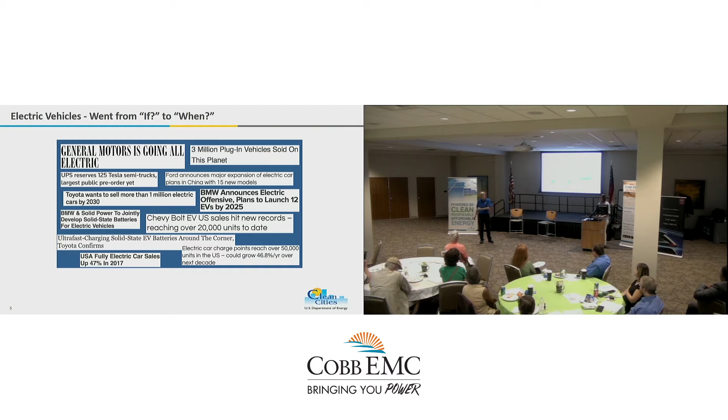I want to talk a little bit about some of the technology because there's a lot of confusion about what's what. There are basically 3 types of electric vehicles. Hybrid electric vehicle, you know that one really well. That's the Toyota Prius, been out there a very long time, a very good technology. There are applications where it makes the most sense.

There are plug-in hybrids. The poster child for the plug-in hybrid is the Chevrolet Volt, V-O-L-T, not the Chevrolet Bolt, B-O-L-T. Plugs in, runs part-time on battery. When the battery's depleted, the engine starts running and runs like a hybrid. Really, really high fuel economy.

I know one of the guys in the room, Chris Campbell back there, had a Volt. He would tell me he would go a whole year on 1 tank of gas. And he drove a lot because he knew exactly how to maximize the utilization.

The battery electric vehicle, the poster child here is the Nissan Leaf. If you look at the 30,000+ electric vehicles registered in Georgia, 25,000 of them are Nissan Leafs. And there's a big reason why that is. Primarily, and you'll hear from Cornelius later, Nissan is all in. Their chief executive, Carlos Ghosn, has said, we're going to be building nothing but a battery electric vehicle in the future.

Availability is way up. In 2011, I bought my first Nissan Leaf. There were 6 vehicles available in the US, not all of them here in Georgia. We really only had 2 at the time. Today, there's more than 40, and that list grows. This list is not accurate because I made it today, because it changes every day. Every manufacturer out there, and my personal opinion is, if a manufacturer is not building a vehicle with a plug, they are the world's best buggy whip manufacturer. And they're soon going to be out of business. I'll show you why in a little bit.

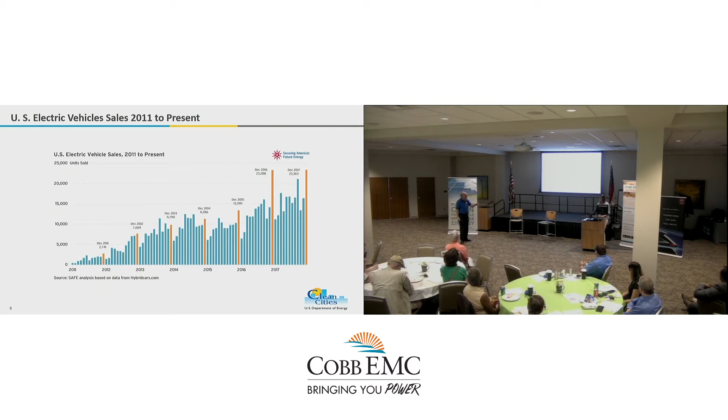Curves are in the right direction. Every year, every month, we beat the previous year. We beat the previous month in sales. And you'll notice this little thing, because everybody kind of does things in December because of the tax credits. There's a federal tax credit for electric vehicles, too. So you see this drop off in January, then it picks back up, drops off every year, but the curve is that way. And that's the adoption rate.

Next one, this is from Bloomberg. I've seen all kinds of charts here, but basically what this says is we're at 1% of the market today. By 2040, 54% of the vehicles sold will have a plug on them.

I've also seen a chart done by a guy named Tony Seba, who has a book out called Disruptive Clean Technologies. He says this is not a 25-year event, it's a 10-year event. 10 years from now, it'll be like the smartphone. 10 years ago, you didn't have one. Now, if you leave the house without it, you'll turn around and go back and get it because you can't get through the day without it in your hand.

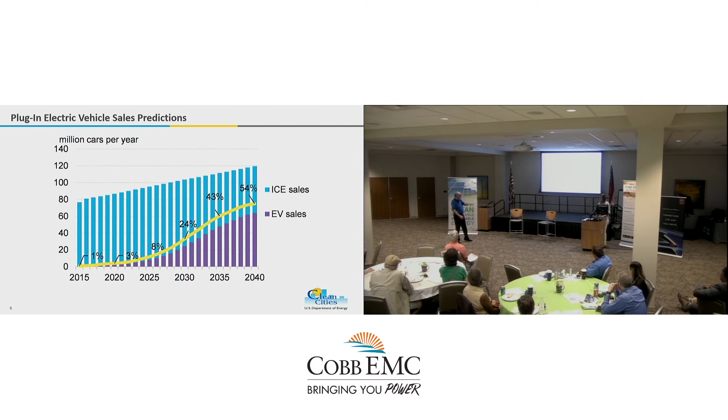I've started noticing people carry it around like this. I at least put it in my pocket. And there's a reason why this is going to happen. Let's go to the next one. Costs are dropping dramatically.

1998, the EV1. I drove an EV1 at Georgia Power for 4, 5, 6 years. $500 a mile of range. The joke used to be, how did you get cheap batteries? You buy the car and throw the car away, because the car costs less than the batteries did, because they were being sold at a loss.

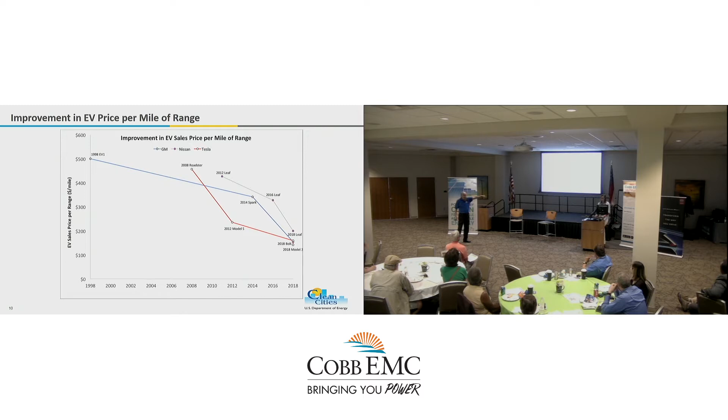Today, you get out to 2018, the Model 3, there's a Tesla Model 3 out there. It is right now the lowest cost per mile of range, but the Bolt is right there, the Nissan Leaf is right there, and that price continues to go down. Let's go to the next slide.

This one is really interesting. Cost per kilowatt hour in a battery pack. We are obviously out here 2016, 17, 18, still a little over $100 a kilowatt hour. Two lines there: affordable EV, economy EV. Look at that green line out there about 2023.

You will go into the dealership in 2023 and there'll be 2 cars on the floor. They cost exactly the same. One's gasoline, one's battery electric. The gasoline's only advantage is it goes a little bit further and it fills up quicker. The electric vehicle goes 200, 300 miles on a charge, maybe takes 30, 40 minutes to recharge, costs you 1/10 the operating cost of the gasoline vehicle.

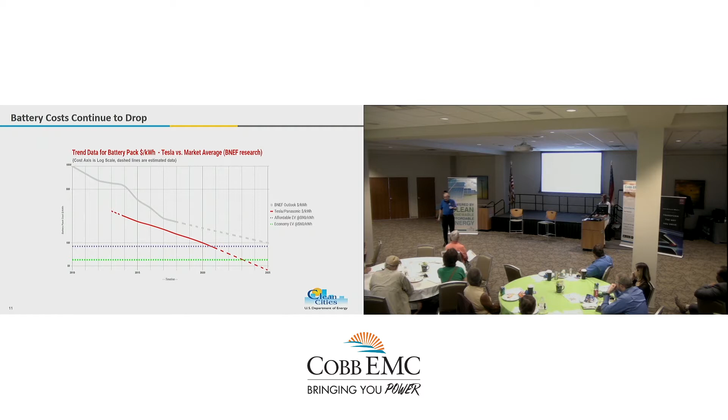So you will only buy a gasoline vehicle if you need to drive long distances and fuel quickly. If you drive back and forth to work every day, park at home, park at work, maybe there's charging at work, you won't even consider a gasoline vehicle because you don't need it, and it's cheaper to get the electric. That's what they call the crossover point, and that's when things really take off. Because the electric will be cheaper to buy, cheaper to operate. It just has one disadvantage: it takes a little bit longer to refuel than a gasoline vehicle.

Next one, we're concentrated right now in certain parts of the country. Atlanta and Georgia did really, really well because we had a very nice incentive, a $5,000 state income tax credit, in addition to the $7,500 federal income tax credit. Unfortunately, this is the editorial part, our short-sighted legislature did away with that tax credit in 2015, and it's costing the state of Georgia millions of dollars a year in revenue. I can get into that with you one-on-one. Just know that your legislature has driven up the cost to the state by eliminating this tax credit.

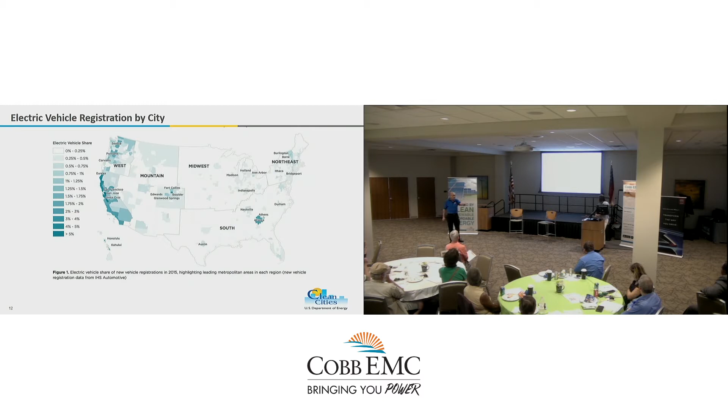And again, the demographics are right. The commuting is right, and we drive a lot of miles and you save a lot of money because you're using electric instead of gasoline. Next one, I want to talk a little bit about the buzzwords here, the technology on charging. It's the next key critical issue. I said, okay, I got the car, now what do I do?

We have 3 levels of AC charging, and there's actually 3 levels of DC charging. Level 1 is 120 volt, 15 amp outlet. You got one in your garage, you can plug it in, the cord that you need comes with the car, plug it in, charge it up overnight.

My neighbors, I live in DeKalb County over in the Toco Hills area. My neighbor next door worked at Emory. He just charged his car on 110 volts, and I asked him why. I have a 240-volt charger in my garage, but he said, I'm 5 miles from Emory, so I go 5 miles over, 5 miles back, 10 miles a day. That would take him maybe 2 hours to charge at 110 volts. There's no reason to spend any more money if you're a low utilization user.

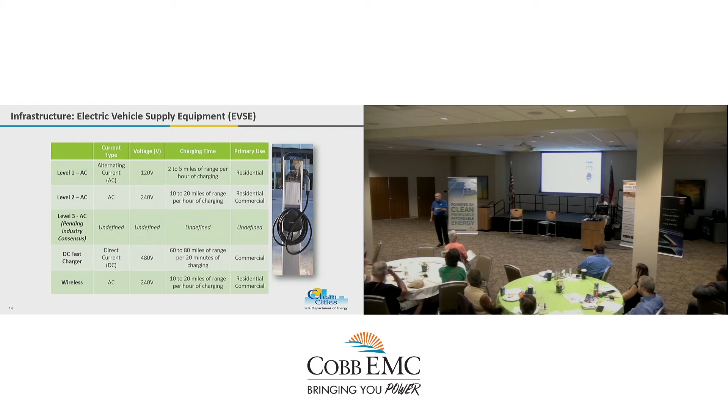You can charge at home, charge in public. You've got to charge in one of two places. Your car sits 22 hours a day somewhere, either at your home or at your workplace. You really only need to charge in one of those two locations, maybe once a day, maybe not once a day. My wife and I, all we have is electric vehicles. We're now totally gasoline-free. She charges her car about once a week, and one of us has to remember to go out and plug her car in, because she only does about 100 miles a week. I charge my car 2-3 times a week because I do a lot more miles. But even with the lower mileage electric vehicles, if you can charge at work or at home, it'll work.

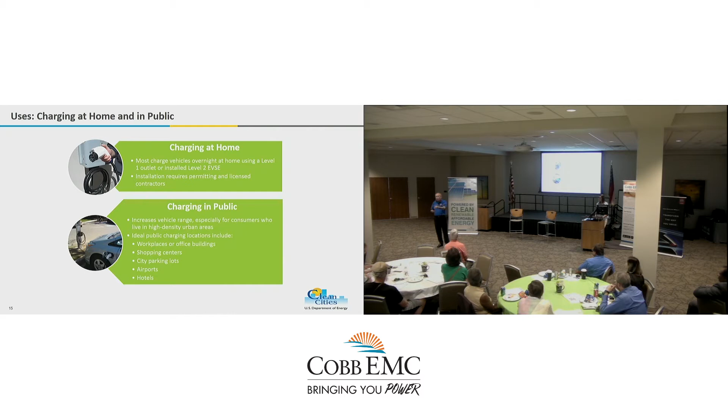I tell people, if you drive less than 50 miles a day, there is no scenario where an electric vehicle will not work for you with the current level of technology.

We are rapidly expanding the amount of EV infrastructure, places to charge. Not only spread all over the community, like here, there are chargers back here and chargers out front. I've used the ones out front in the past, but they're all over the place, at the malls, at the dealerships.

What we're working on right now is the corridors, so you can drive to Savannah, Chattanooga, Charlotte, Montgomery, or Birmingham, or wherever. Every 50 miles on the interstate, there's a place to charge the car with a DC fast charger, meaning that's a 15, 20-minute event.

Depending on what you're going to be doing, one of the stations I use is behind a Starbucks at Tifton. By the time I get out of the car, get my Frappuccino, and get back, the car's ready to go. It's waiting on me, I'm not waiting on it.

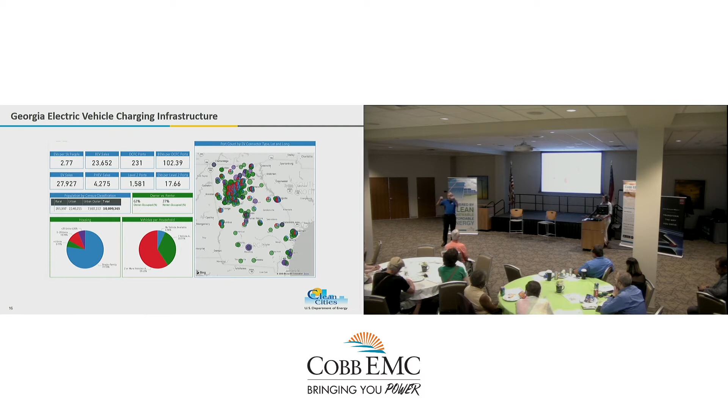I drove to Savannah already. My car will make it all the way to Savannah. I still had to stop in Dublin, not because the car needed to, but because I had to. I can't go as far as the car can go. So take the issue of range anxiety off the plate. It doesn't exist anymore.

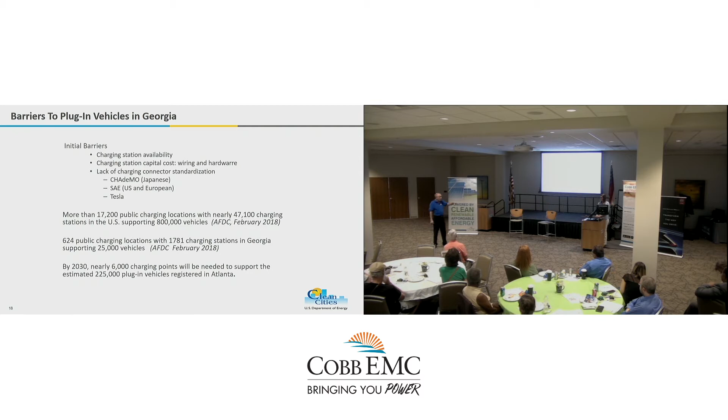People ask about emissions - well, you're just using that dirty coal-fired plant. We talked about renewables today. The electric vehicle is the only vehicle out there that can use renewable energy. And the larger the renewable energy component gets, the better the car gets.

I updated that slide. The last one I'd seen was about 60 miles per gallon. Today, on a nationwide basis, if your vehicle doesn't get 80 miles per gallon, you are dirtier than a gasoline vehicle or electric vehicle, even though it's running on a coal-fired plant. It varies across the country. Today, here in the Southeast, we're about 56 miles per gallon. So if your car is not getting more than 56 miles per gallon, I am cleaner than you.

I'm also a lot cheaper than you. And this is going to get better and better because the number of coal-fired plants continues to decline. The number of natural gas plants is increasing. Nuclear is coming on board. Nuclear is really great when you look at greenhouse gas emissions because there are none. And it's a 50-year asset - it's going to be out there doing something forever.

Again, and the renewables - solar and electric vehicles go together perfectly. You get a better return on investment if you have an electric vehicle that your solar panels are charging, because instead of buying $3 a gallon gasoline, you're getting free electricity. Go to the next one.

Looking at greenhouse gas emissions, even with today's mix of plants, we're at half the greenhouse gas emissions of a gasoline vehicle. If you look at criteria pollutants like nitrous oxides and smog—Atlanta's been the poster child for non-attainment for years—we see a 90% reduction, even with the current plants we have.

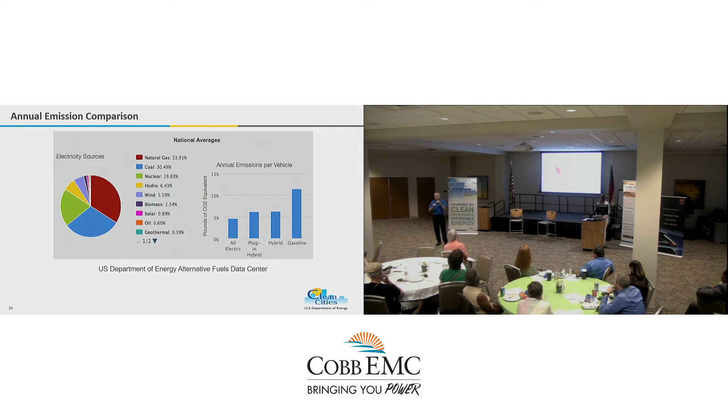Let's go to the next one. A lot of data, throwing a lot out there. It was mentioned in the last presentation about NREL, the National Renewable Energy Lab.

We have available through what's called the Alternative Fuels Data Center access to models and cost analyzers. You can go in there and say, I'm thinking about buying a new car, let me compare the car I usually buy with a Toyota Prius, a Chevrolet Volt, a Chevrolet Bolt, a Nissan Leaf, and do a cost comparison. You put in your miles, what you're paying for fuel, and it will tell you the best pick for you based on your situation.

Great location—there's other things here too, what's called the station locator down in the corner, part of the Alternative Fuels Data Center, AFDC. Google AFDC and you can find it, then look and see where the stations are around you. You'll be surprised how many electric vehicle charging stations are around you.

We have a goal. We're working on a project in the Buckhead area where no one will be more than about 250 yards from a charging station. The City of Atlanta just passed an ordinance requiring all new construction to be PEV-ready for 20% of the spaces, so this is happening very rapidly right now.

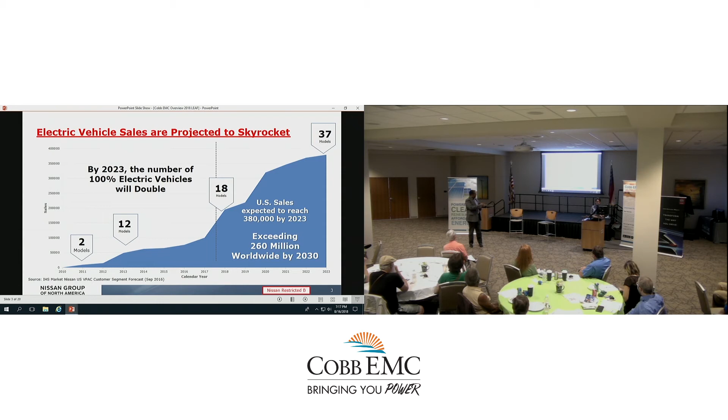Let me tell you why this is happening. You've all seen charts of what's happening globally. Right now, the Earth is the hottest it's been in 115,000 years. 16 of the 17 hottest years on record have occurred since the year 2000. And I don't know if you looked in the paper about a week ago, Europe recorded the hottest day it's ever had. I think Europe's been around a while. And I would say that when something like that happens, maybe it's not a fluke.

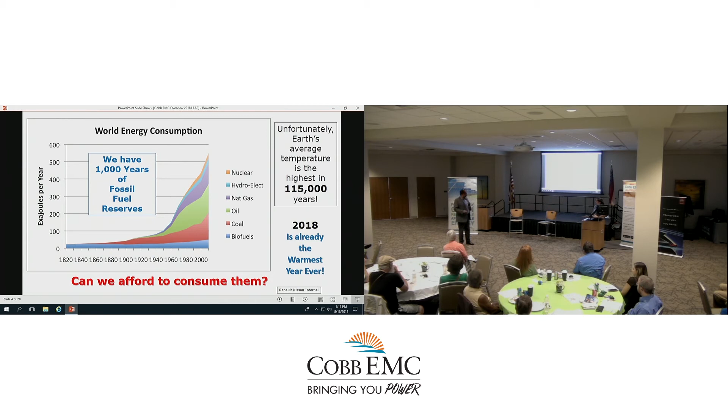Now, Atlanta. Atlanta has the fourth worst traffic in the nation. I know that when you're sitting on the connector, you might think that you're number one, but it's actually number 4.

15 counties are below the standard for attainment in air quality and particulate matter. Hopefully we don't get to the level of China, where they're saying they lose 1,500 people a day, and they have suggested that the elderly and children should not breathe the air. Now, they don't actually explain what the alternative is, but they've at least done their part, which is given you the warning.

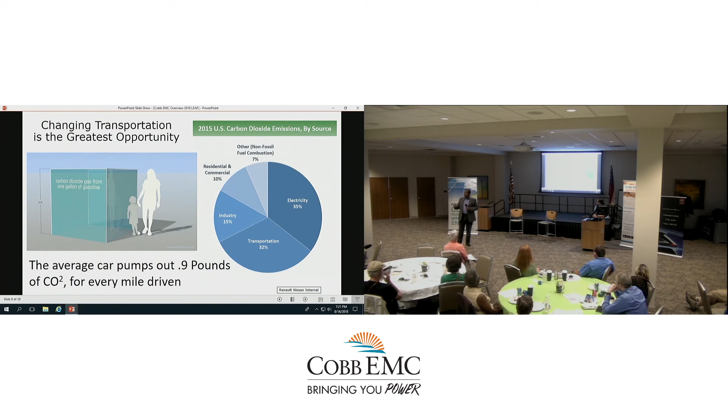Now, this gives you a pretty good idea what one gallon of gasoline produces in terms of CO2. And you can also take a look at where we have a chance to make a difference. You really can't make a difference in industry in terms of reducing CO2. It can be done by mandate, but we basically have industrial output that gives jobs, and it makes it really tough to cut back on that. But transportation is the variable. And we have the opportunity, through a conversion from gasoline engines to electric vehicles, to reduce the amount of carbon we put into the air.

When you look at the numbers from the National Household Travel Survey, which looked at 749,000 individual trips, you find that only 1% of trips exceed 70 miles, and 95% of trips are below 30 miles. That means an electric vehicle with a range of 150 to 200 miles is more than sufficient to handle your everyday needs. Now look at some of the other demographics.

Most people who drive electric vehicles are married. They already have their minivan or family hauler at home. When they go on vacation, they've got that vehicle for a long trip. They need a vehicle to go to work, they need a vehicle to get around. As a general rule, an electric vehicle will do that job more efficiently than a gas-powered vehicle will.

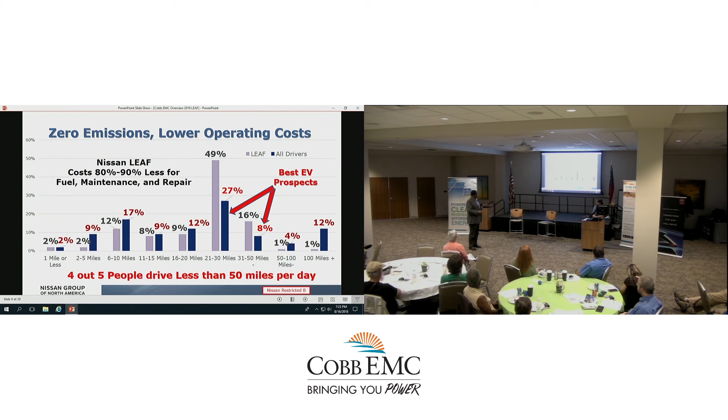I always think of this, and I did work for Ford, even though I now work for Nissan. Henry Ford, when asked about building a car, said most people would have told him they wanted a faster horse. We had this problem already, and it's interesting that every time we make a conversion, there are those people who try to hold the dam back.

The reality is that when the horse came along, it produced a problem in the United States. In Manhattan, there were about 440,000 horses in the New York area. And they have an emissions problem - about 35 pounds a day. 400,000 times 35 pounds a day, times a month, you can see where that could be a problem.

There was a belief that this was a problem that could not be overcome. There was no other answer until the automobile showed up. And within 10 years, there were only 20,000 horses in New York - the automobile had completely replaced the horse. We're now in a position where electric vehicles have an opportunity to replace gas-powered vehicles.

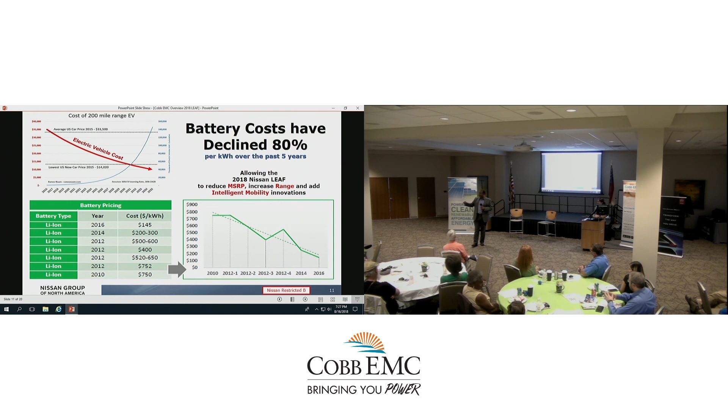We are the last generation that's going to ever have to give up driving. My mother gave up driving when she was 92. None of you will have to. There'll come a point where your car will drive itself, and it will be an electric car. You'll call it with your smartphone, and it will come from its parking space, come get you, take you where you want to go, and go park itself and wait for you to come back.

The reason that's going to happen is because of math. It costs a lot less to drive an electric car. When you talk about spending 10 cents on the dollar, go to the DOE numbers. The DOE numbers say that the average automobile in America is 11.4 years of age, has 150,000 miles on it, and costs $353 to keep on the road for fuel, maintenance, and repair, not including payment. There's going to be a transmission, a water pump, a thermostat, a fuel sending unit, spark plugs, oil changes. There's going to be costs, none of which exist on an electric vehicle.

That means that even if you look at something as economical as a Chevy Cruze or even a Chevy Volt, a Leaf, a 100% electric vehicle, costs significantly less to keep on the road.

Now, we win all types of awards. I'm going to skip through this part because I know we're going to be asking some questions later.

We won innovation awards. This part I think is going to be very interesting for you. Because we're dealing with electric vehicles, we have the ability to do a lot more with electronics. And one of the things we can do is bring driver assist technology that's going to save your life.

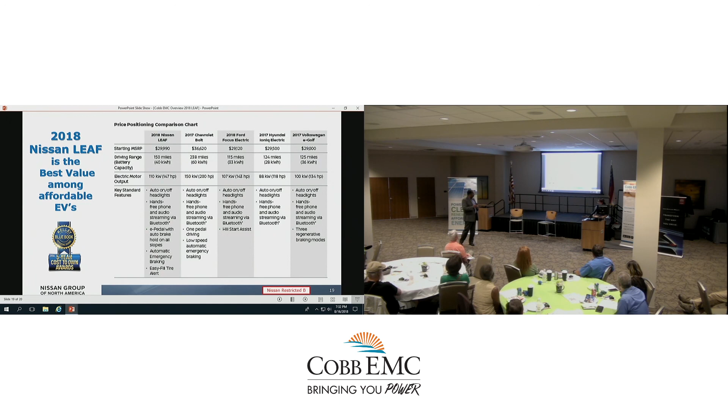We have a lot of things that we think make a difference with this vehicle, but I think the intelligent mobility piece is going to be the key to it. Now, I did drop this in, and I think Don touched on it, so I'm not going to touch on it again. I think they wanted us all to come up here after the fact.